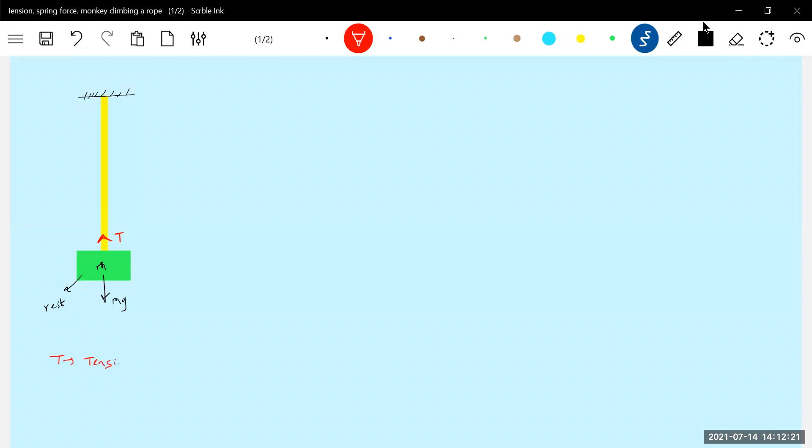And how will it act? It will act in this way. Agree with this. So now what is T? T, I am going to call it tension. Now what is tension? How to define tension? Tension is a force set up in a string. So tension is a force.

Next question: can you say anything about tension? We are very new to it. Regarding tension, the first point is what is the nature of it? It's electromagnetic in nature. It always acts away from the body.

So there is one condition. Then sir, what else? Still only this much. Further, it always acts tangential to the string or rope. Here string, rope, thread, both are same.

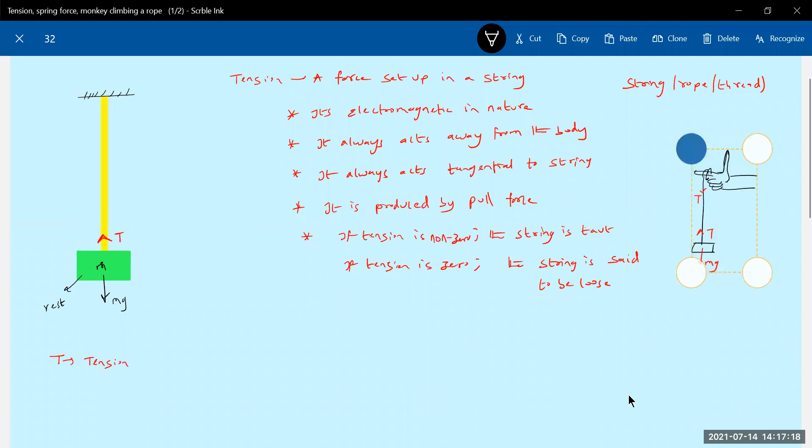There's one basic condition we are defining. So what do you mean by loose? Like suppose if you don't suspend anything, let me take the same diagram. You remove this, then how will the string be?

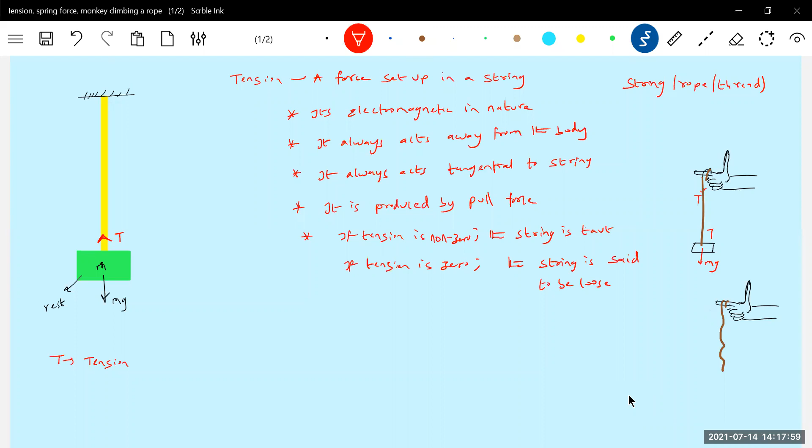Some of you are saying sir you're not seeing it properly. Okay, got it? This one is called loose, the string is loose. This particular string is called taut.

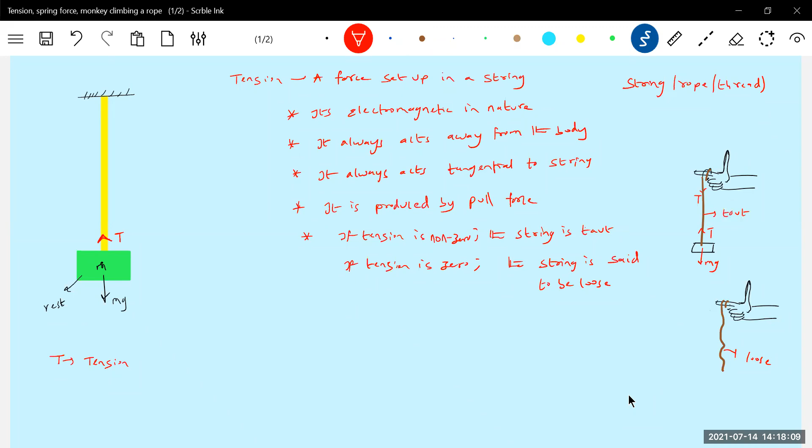I'll give all the examples. This is very important, if you start checking you can see that. Almost every numerical we encounter this tension. The concept of tension is very, very important. So it's like a string, thread. It's left to you, whatever you want, you can call it that.

Okay, I get this. So there's one very basic idea regarding tension. Let me give you its electromagnetic nature. I can't say much about the gravitational force here. It's electromagnetic nature, due to interaction between the molecules, this comes into picture. So being electromagnetic in nature, it always acts away from the body.

You see that one, at this end the tension will act here. At the upper end, the tension will act in this way. Then what this rope is doing is trying to pull down. Definitely what this rope is trying to do is try to pull your finger down. So therefore I'm showing the tension force.

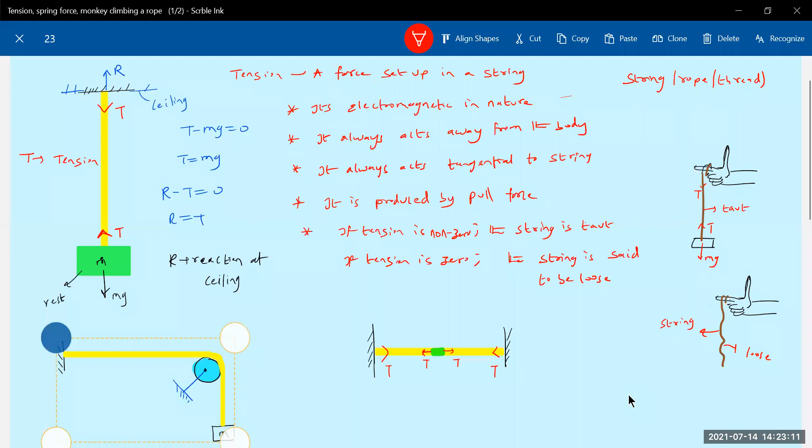There's a rope we have like this. So I have suspended here, I'm going to suspend a block. Then what we notice here again, it can happen, no, like this. And sir, what is that disc? This is called a pulley.

Go to a medical shop, ask for a pulley rope, they'll provide this one. The rope will pass over it. So what is this? This one is a rope. Rope, string, thread, all are the same.

Okay, let's analyze here now. What are the forces acting? The weight mg will act. Who will balance this weight? Tension. So how will the tension act here? Away from the body. So let me show the tension here. The tension at this point will act in this way. Similarly, the tension at this point will act here, and the tension at this point will act here.

And here, the reaction, if you want you can give something. Let me use the word reaction, R. R is not radius, R is a reaction.

Okay, there's a pulley, so there's a rope, so we'll get this one. So I will define a small element. Then how will the tension act? You have to show the tension as acting away from the body. Getting the idea?

Sir, R equal to T also? R equal to T, yeah, here also. What is this? There's a wall. So here T minus mg equal to zero, T minus R equals zero. You can write R equal to mg if you want the reaction.

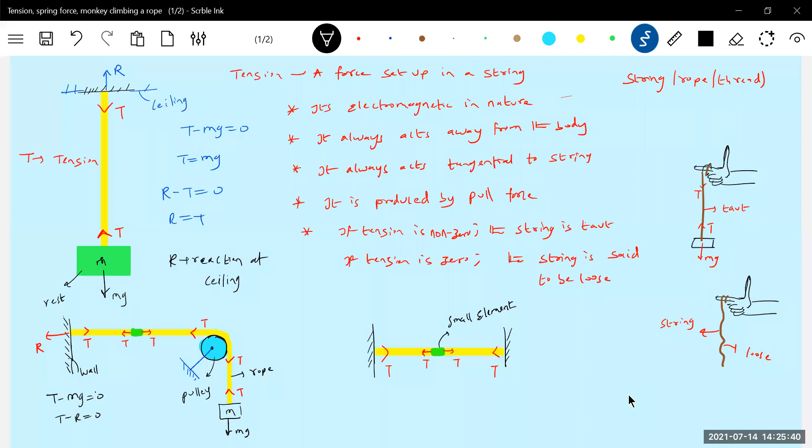Make an observation. What is that green color? Small element.

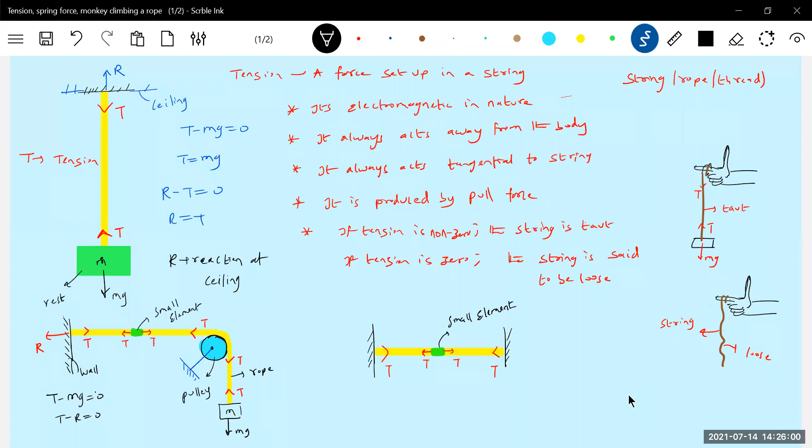What do you mean by normal force? Fatima, what do you mean by normal force? Something, okay, what is normal force? Where you want, tell me. Sir, from the wall. No. Just like, see, this rope, very simple. Please don't think very big, just take a nail, tie a rope to it, and try to pull that nail with the thread. That's what I'm discussing here.

Sir, but there also normal force will come. If you connect a thread to it, so there won't be that one. The tension force is nothing but the normal contact here. Okay, sir.

So okay, fine sir, everything, it always acts away from the body. Are you treating this pulley as a body? Yes, for this pulley and body, and it will act tangential. You see that one. Here I'm showing tension like this, for this part. How is this? Here it's vertical, it's horizontal. So it will always act tangential, away from the body, tangential.

And what do you mean by taut? Is it taut? Yes, the string is taut, tension non-zero. Is it taut? Yes, string is tension non-zero, taut. What about this? Loose, because there is no weight suspended.

Next, again, the tension is produced by pull force. What do you mean by pull force? The weight, and the ceiling is trying to pull the rope up. The weight is trying to pull down. The resultant of, so these two are what? Pull forces. The weight is here, what happened? The mg, it is trying to pull down. The ceiling is trying to pull up. So what forces are acting on the rope? The pull forces are acting.

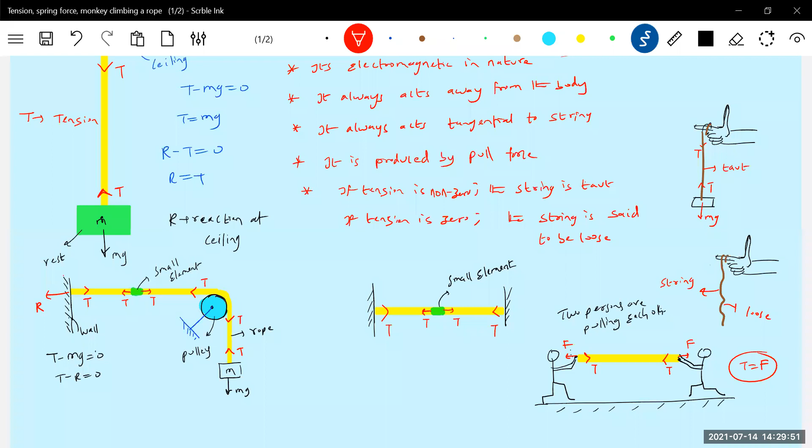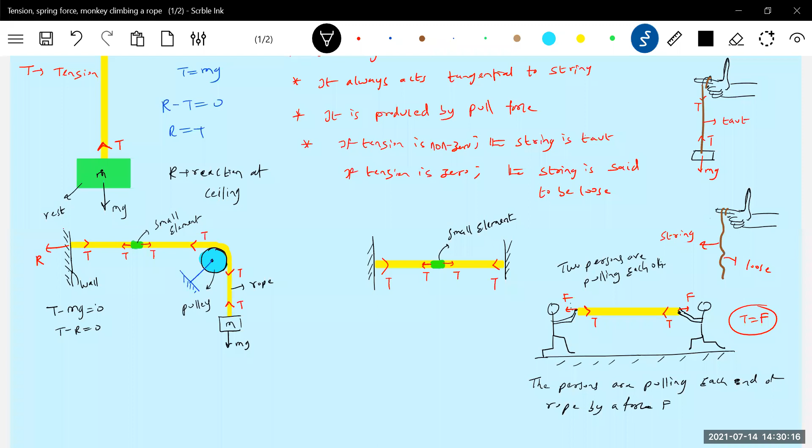Okay sir, so now the persons, let me just write here: two persons are pulling each end of a rope by a force F. Now the tension in the rope is T equal to F. With what force the persons are pulling, that is what the tension here is.

Sir, if both pull with the same force, then tension will be 0? Tension will be 0, sir? Some common sense: if you pull both the ends, tell me, what is the state of the rope? Taut, no? When the string is taut, tension should be non-zero.

Not played skipping, huh? Not plate skipping. Never played any skipping with a rope? I'm asking something, okay, later on will come. Did you play skipping or not? Yes, sir.

Did you ever tie any clothes on a rope? Yes, sir. Did you first of all see a rope? Yes, sir. Okay then, if you pull it, tell me what is the state of the rope. You and your sister or brother hold the rope and try to pull each other. Tell me, how will the rope be? Straight, no? So it's called taut.

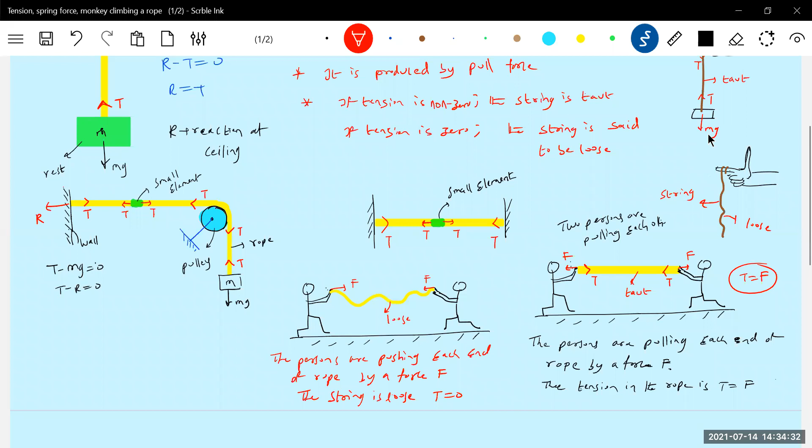Okay, make observation. I'll go for a few more cases, a few more things I have to explain.

So here string means nothing but the thread, cotton thread, which we use very frequently in our home to stitch clothes or something. It can be even threads or cotton thread, or any material. Rope, rod is different, string is different. Please do understand, rod is different, string is different.

Somebody is telling, sir, is it rod? So rod, string, if you don't know, what shall I do? This is not a rod, it's a string. Please, all of you, some minimum common sense must be there. Again, rope or string or thread.

To hang clothes is what that string is for, that's what I'm discussing here, nothing big. Okay, now it will act tangentially. Will tension be opposite to the direction of force? What do you mean by that?

See, like here, suppose you are holding this, your finger, string and block. All this is your body, or this is a part of your body, this is the string, this is a block. You tell me. Only hand is the part of body. How many bodies are you seeing? How many different bodies you are seeing?

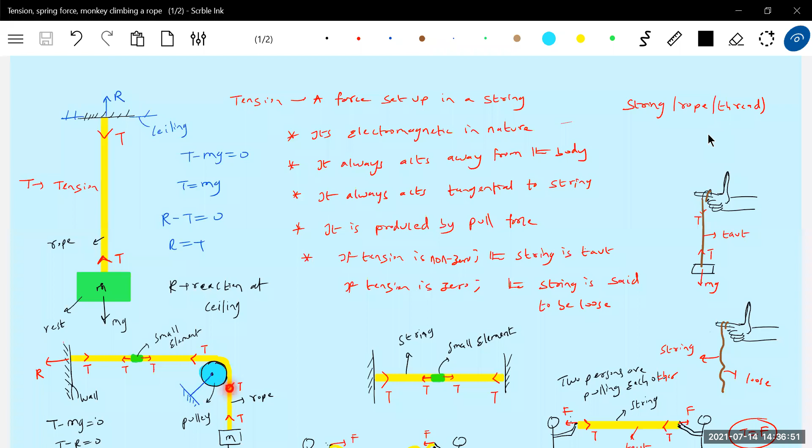Okay, now how come you say that tension is opposite to F? Okay, you're looking at the diagram, you're telling. What is the tension in the rope? T. This F is what?

Person is pulling one end of the rope. At the end of the rope is what this F is acting. Yes, sir. So got it. Okay, this what we are discussing is we are just discussing from one end of the rope to the other end. At one end I'm pulling the rope. Okay, no doubt, I'm holding the rope, I'm pulling it.

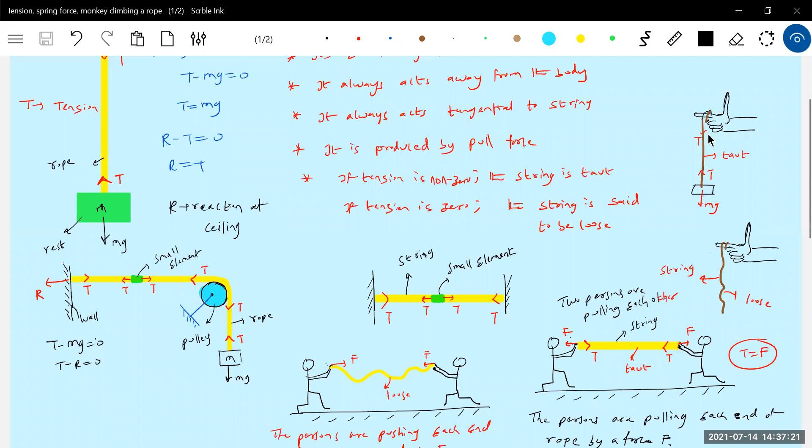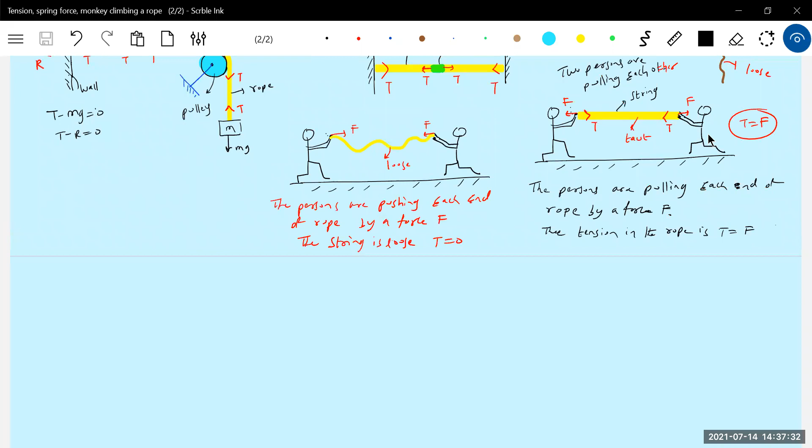Then here what happens? F will balance T. Okay, sir. You have to hold one rope, that is the major problem. Purchase one rope, go there, 30 rupees plastic rope will come, tie it to any door or window frame, try to pull it and analyze, make observation.

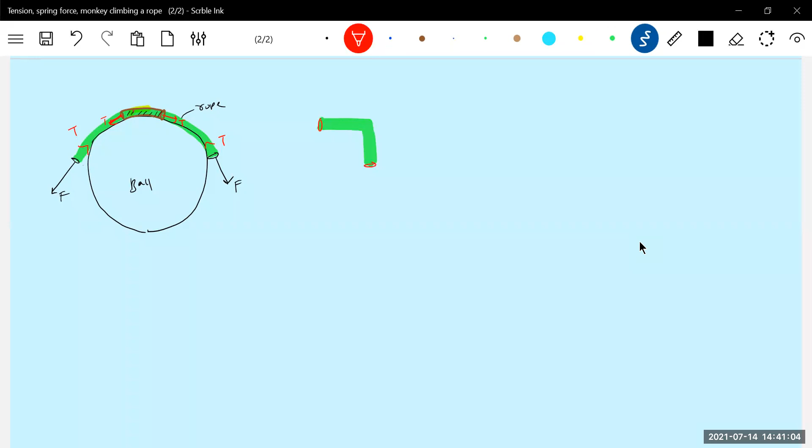How is the tension? So here let it be this one. I am applying a force F, this is an axial force. Then the tension here should be in this way. So the tension will always act tangential. That is the one golden rule.

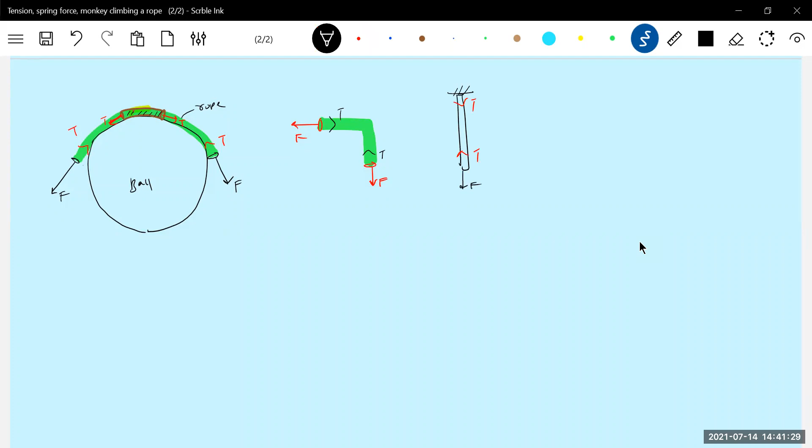If it is vertical, already we have seen how the tension will act in this way. If it's horizontal, how does it act? Tangential to the rope. Tangential. I think now you got the idea. Tangential along the length of the rope, it will act.

You have to show that. So how is it a curve, no? So therefore you have to draw a tangent to the rope. Whatever the shape of the rope, the tension should be directed tangential to the rope.

Who will pull this? These are the pull forces. Okay, pull force I'll show by black color. Now you'll get confused again.

Okay, fine. This is about the basic idea.

Okay, let's take some example. Sure. Thank you, sir.

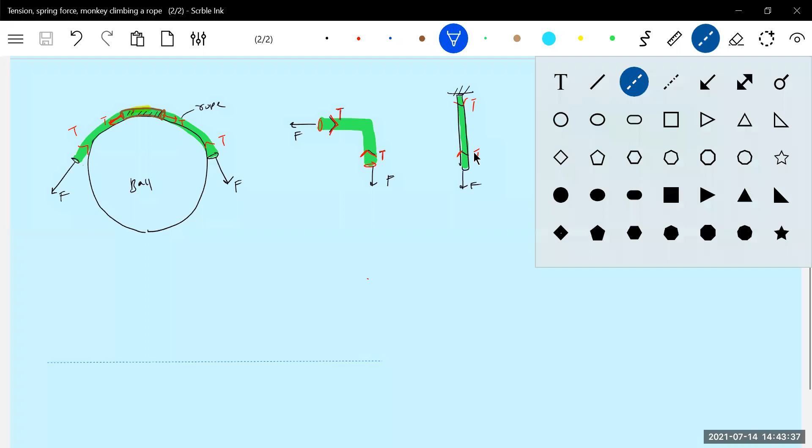Sir, in the diagram, is it tension or force, sir? Right side one, top right. Oh, I didn't write it right. Okay, T it should be, yeah.

We have a string. The string I'm showing by brown color. Instead of showing it thick, I'm just showing it by a brown color line. That is the string. I'll pull this block by force F. M1, M2, M3 be the masses. This is a surface, a smooth surface. You might have played this when you were a kid. Toy train.

The toy train is what we are discussing. We have to calculate now what is the acceleration of the block and what is the tension in both the strings.

Now when you pull the block M1, will M2, M3 move or only M1 will move? All three will move, sir. These are very basics of basics, sir. You tie 3 blocks or any 3 toys, then you start pulling, this will also move. And what is the acceleration of all? Must be same. The acceleration of all blocks must be same.

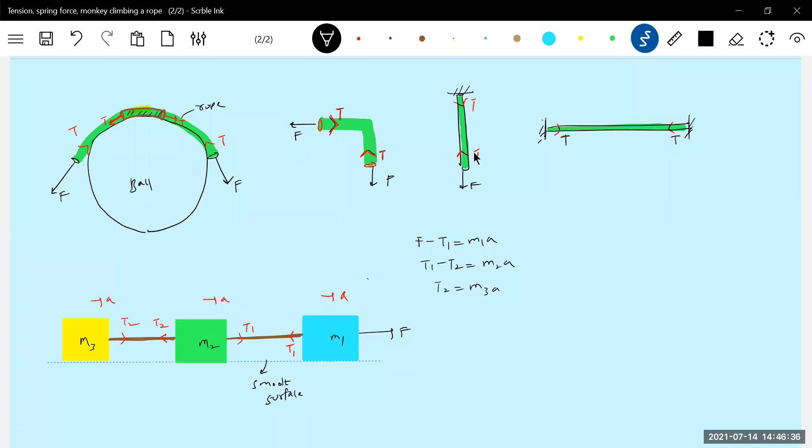Then let's add up all these equations. What is the net force acting on this system of blocks? F only. But what about this? This will become internal to this system. If you look at everything, plus T1 minus T1, plus T2 minus T2. What is the only external force acting? That is F.

So that you are getting it. You can, if you want, write it directly, this is individual, you see that one. Sir, how come you write F positive? This is T1 negative. If a force acts in the direction of motion, it's positive. If a force acts opposite to motion, it should be negative. T1 acting in the direction of motion, so positive. T2 opposite to motion, negative. T2 is acting in the direction of motion, positive. Opposite to direction of motion, nothing is there. Okay, only T2 I am writing.

Okay, I got the acceleration. Let me substitute here. So what is T2?

Similarly, I want an expression for T1. It's left to you, either one you can substitute. Let me use M1. So what is A? F by M1 plus M2 plus M3. T1, we wanted an expression for T1. So F minus...

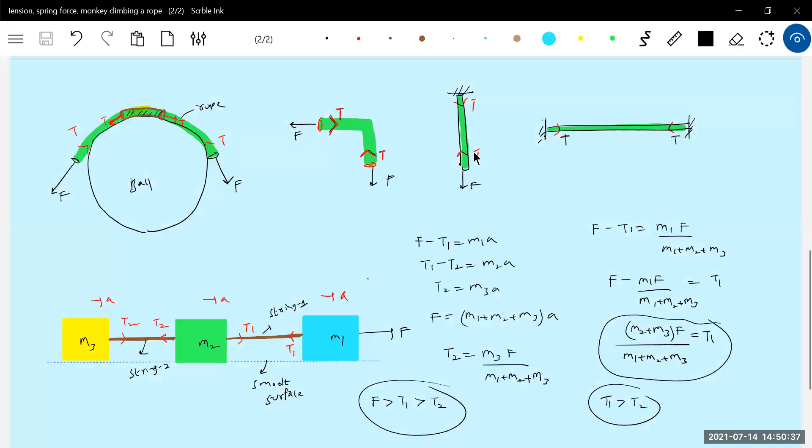Okay, write it down. Now a situation is there like this. There's a rope.

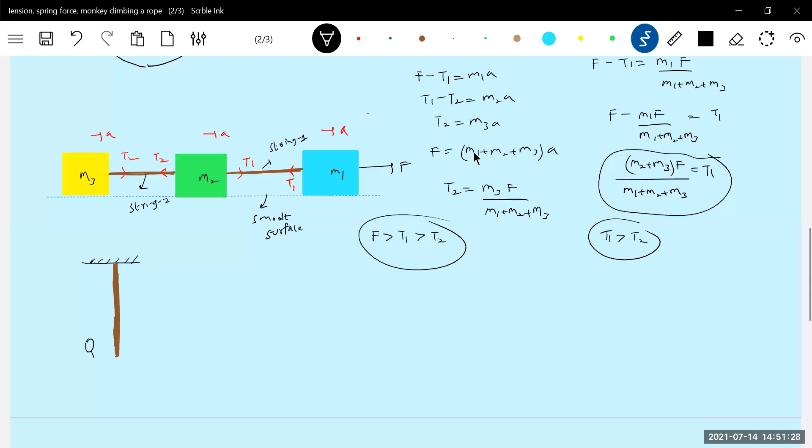Sir, F minus T1 is the force exerted by the second string in between them. What do you want to ask clearly? No sir, how to find out the force between two blocks exerted by the string? Ask the question clearly. Sir, how to find the force between M3 and M2? That is T2, no? Are you not saying string 2? And what is the tension? T2. Okay sir.

No, there's a rope. You pull the rope by a force F. Then how much tension will the rope have? We are going to pull it. I'll pull the rope by a force F. I think there's a quite natural type thing. With what force you pull the rope, that will be the tension in the rope. There will be the tension in the rope.

So the tension in the rope will act here, in this direction. Then the weight of the person will act. The person will press the ground, so the ground will exert a force, Ng. The person will be holding and pulling the rope. Tell me, what are the forces acting on the person?

On the person, the forces acting are, if you like, Mg, I'll write it. So only on the person, I can't draw again the person. The forces acting on the person, we'll draw the free body diagram. Ng and T, sir. The forces acting on the person are this much.

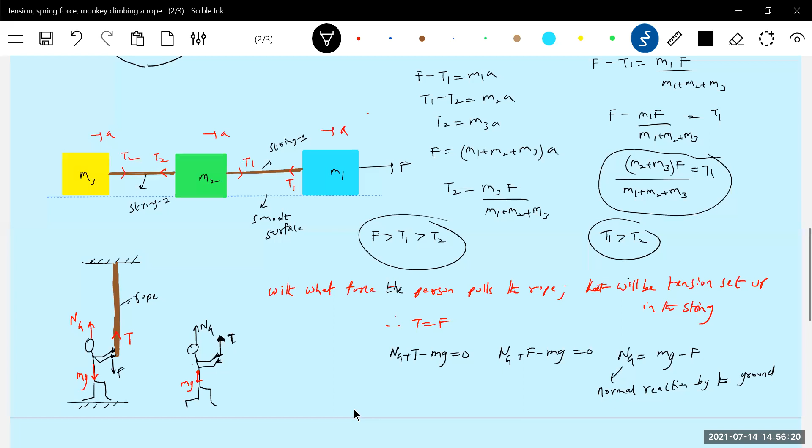Sir, the force is acting opposite to NG, no sir. The force with which you are pulling is opposite to the normal contact force exerted by the ground, no sir. Yes sir, NG and F are in opposite directions, I'm saying sir. F is something, will exert a force.

Okay sir, tell me this F, sir, why you are not showing F on the rope? One end of the rope I am pulling down with my arm, the string will become taut, a tension will act. Now you have to show, on the person, like this. Don't show F on the person down.

Okay sir, understood sir. Sir, I have a doubt. Sir, if the force which we apply to pull the rope is greater than our weight, sir, that time the normal reaction will become negative now, sir.

You will start climbing up, my dear. Sir, but the normal reaction will be negative now, sir. If you were in class, I would have really scolded you like anything. I'm telling you that you are going to climb up, my dear. Yes sir, never seen such things. Very sad, seen sir. Very sad, very bad this is.

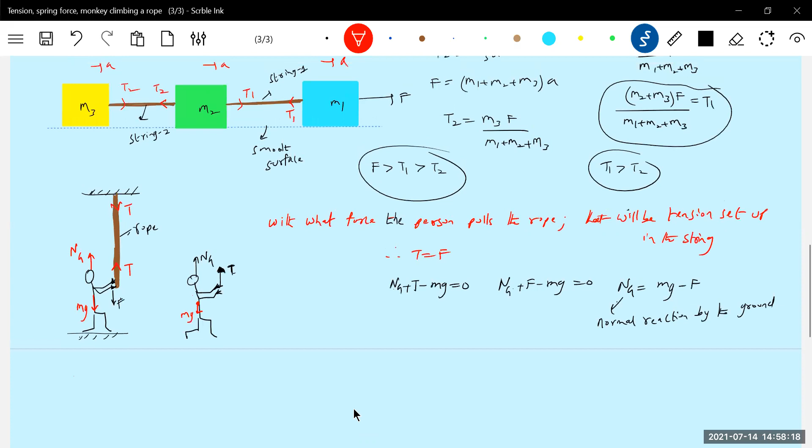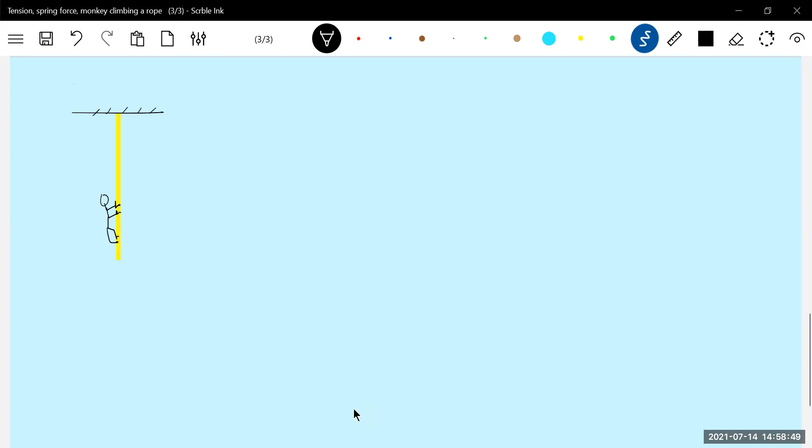Okay, now this is about the tension. So now we'll do one thing. A person wants to climb up the rope. Then we'll see what conditions will arise. This person only is going to climb up, having a weight mg.

So first of all, his weight mg will act downward. Now what is to be done? He should hold the rope tightly. Then he should start climbing up.

Okay sir, fine. We'll do one thing, I'll apply oil to it, then I'll ask you to climb. Possible? Not possible, no, because there's no friction. So what actually happens is there is some sort of frictional force between your palm and the rope here. Because of that friction, the person is able to climb up.

So how that friction here is what brings the beauty of this climbing of the person into picture. Make observation. Here we just say tension, in the books they are given like this. There's a tension, and the tension will act away from the body. In fact, you better take it this way: a friction will act here on the person, the frictional force will act. I'll show, I'll take a little bigger one to show forces.

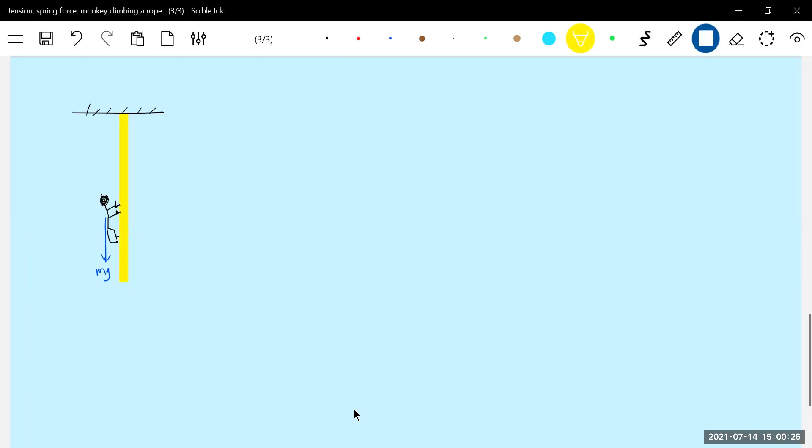It's not a lizard, some person only, so he is climbing up. Here what actually happens is the friction on the person will act here. I'm showing things very clearly, please note. And in turn, the friction on the rope will be like this. This friction is trying to pull the rope down, then nothing but a tension will come into picture. Let's show by...

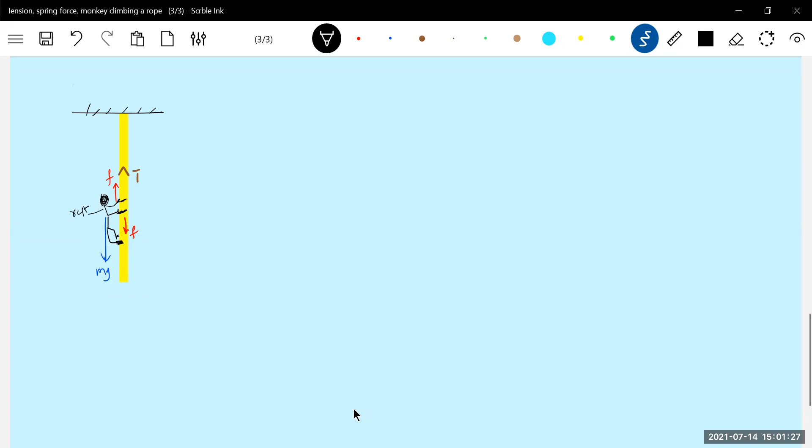If you take only the person, what are the forces that are acting? Suppose a person is at rest, then how you write only the person? Okay, I'll bring the person separately. Then if you bring the rope separately, let's see that.

Now, what is the state of the rope? It is taut, no? Why it is taut? Because the friction here is some sort of acting downward. Now the string has become taut, so a pull force is there. Sir, how come only one force? At other end there will be a force acting, then here the tension will be there. Tell me, what are the pull forces? Here the friction is trying to pull it down, the rope. At other end, the ceiling is trying to pull up. These two will set up a pull force. Because of that, the string will become taut. So what is the state of this string? It will be taut, I have to show tension here also.

Got this idea now? So here in the books, what happened is this F is what they removed, that is they're telling that this tension is acting. But this is the basic idea. Individually, if you analyze the force acting on the person and the rope, you can see why the string is taut. What is the basic necessity? The string will be taut only due to pull forces. Which part of the string will be taut? Only this part from where he is holding. This may cause confusion, some students are getting confused. I have to show this friction here.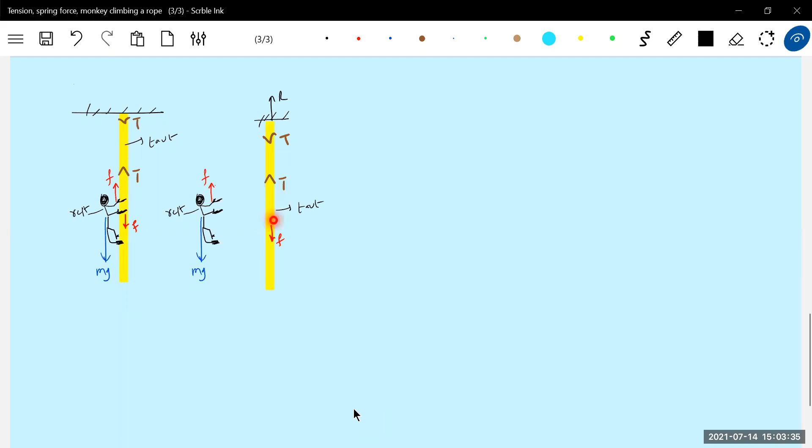It's not on the person, it's on the rope. Let it be here. Now, which part of the rope will be taut? Only this part, the remaining part won't be taut because nobody is there pulling it down. Getting this, this part will be taut. You might have seen this in many programs where you hold the rope from here to here and it will be taut, while this lower part will be loose, because there's no pull force in the lower part, so no tension here. So this part will be taut.

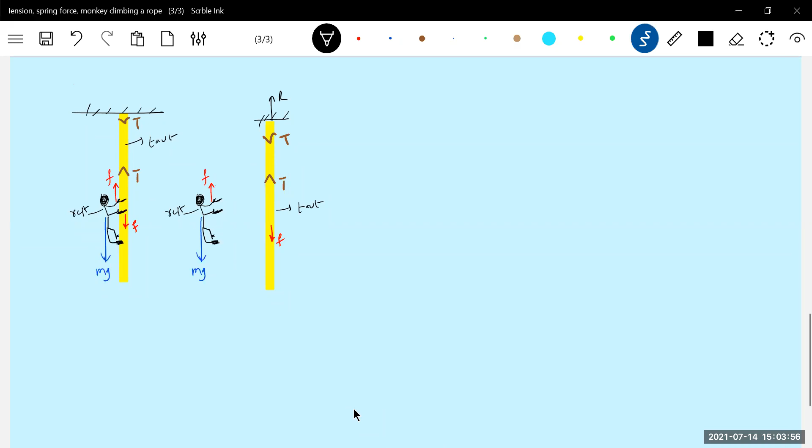Now what is the tension in the string? This F. Now the person is at rest. For the person to be at rest, F minus mg is equal to 0.

Then on the string, it is taut. So net, how will we write here on the string? What is the equation? T minus F equal to 0. So finally, what can we write? T is equal to mg.

This is a basic idea we have to bring here. But, sir, is it tension acting on the person? No, the friction is actually acting. The previous problem I wanted to explain, but everyone would get confused, so I brought it here. Now the exact explanation is what I am trying to give.

Okay, got it now? So now if you apply oil and try to climb, it will become slippery. Not possible, because there won't be sufficient frictional force and you can't climb up.

Now if the person starts pressing hard, how will this friction come? It depends on how much hard you press the rope, how tightly you hold the rope, and you will start pushing yourself up. Okay, now the person starts accelerating. What conditions will come here?

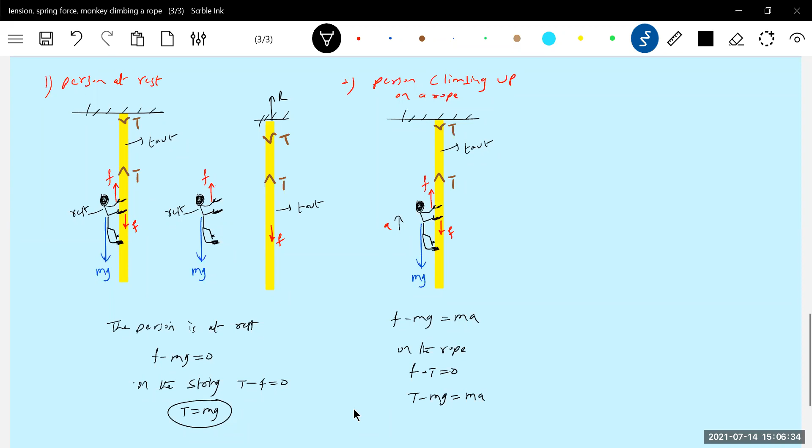So he's climbing up the rope with an acceleration. So T equal to mg plus ma. So what is the tension in the rope? Equal to this much here.

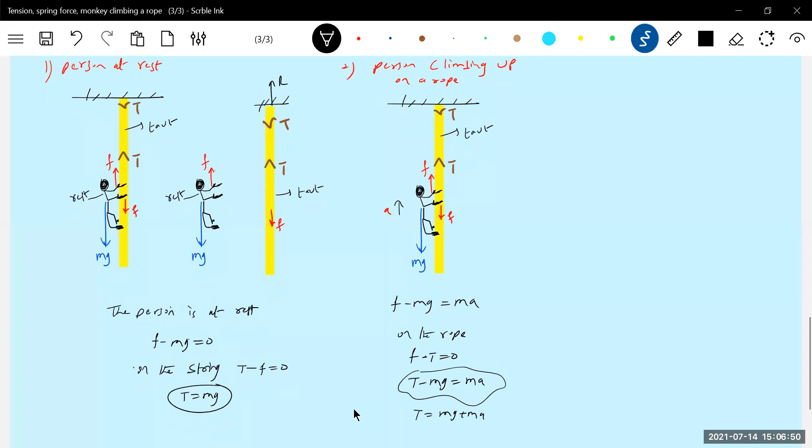Similarly, we can make a situation where the person is climbing down. Try to analyze it very practically, it will be very easy. On paper, see what all we can do. Nothing much is there, just some basic idea — if you have that, it becomes a little easier. You can pass through all these topics very easily.

Now in this case, mg minus f equal to ma. On the rope, what is the equation you can write? So tension should be like a pull force. Okay, this F is pulling. What about the other force, from the ceiling? Now from here to here, can you show the tension? You have to show it away from the body. This ceiling is like one body, so tension here, and this person holding here also you show the tension. Got it now? That's the same thing here.

So if you want, you can write here R, no problem. Finally, what you can write here is mg minus T equal to ma. What is the tension here now? Mg minus ma.

So if you want to climb up, what you should do? Now, what do we have to do? Yeah, it is there, climbing down. Now, if I want to stay there only on the rope, I should press the rope in such a way that the frictional force acting should balance my weight, or the tension in the rope should be equal to my weight, indirectly. I should press the rope so hard that the tension should balance my weight.

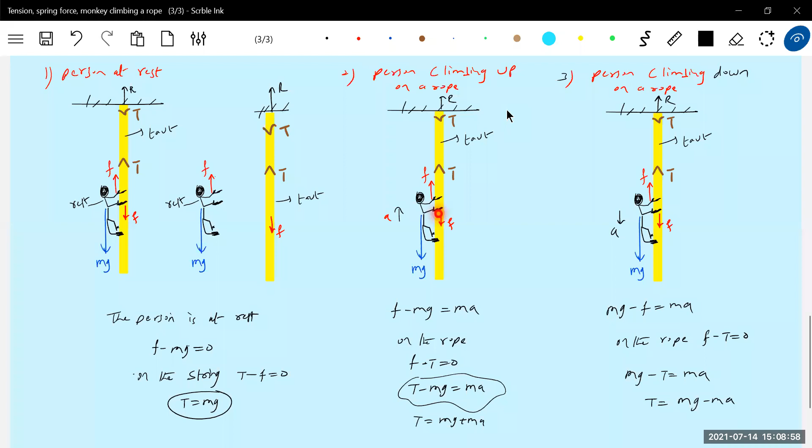Now what should I do if I want to climb up? I should press the rope hard, and I should try to climb up such that the tension in the rope is greater than my weight — then I am going to climb up. If I want to climb down, I should open slightly, not press the rope so much. Okay, there should still be some friction between me and the rope. Then, if the tension in the rope is less than my weight, I'll start climbing down. This is what in the books we explain.

Sir, here pressing the rope means we should press it downwards so that we can move upwards.

Sir, can we take M common here? Yes, you can take M common. Press down, press up... oh god, like climbing up a rope, don't know.

How do you climb up? Just by pressing will you climb up? What should you do to climb up? What should you do with your fist there? You'll hold the rope, no? So you are going to move your arms to move up. I can't show the climbing up of the rope here, only one diagram is there, please do understand. How do you climb up the rope? Just if you press it, will you climb? No, you are going to move your arm, holding the rope, moving your arms up. So when you press hard, what happens? The tension becomes greater than mg and you start climbing up. Just by mere pressing you can't climb. Please do understand, or else watch some video, or climb the rope yourself.

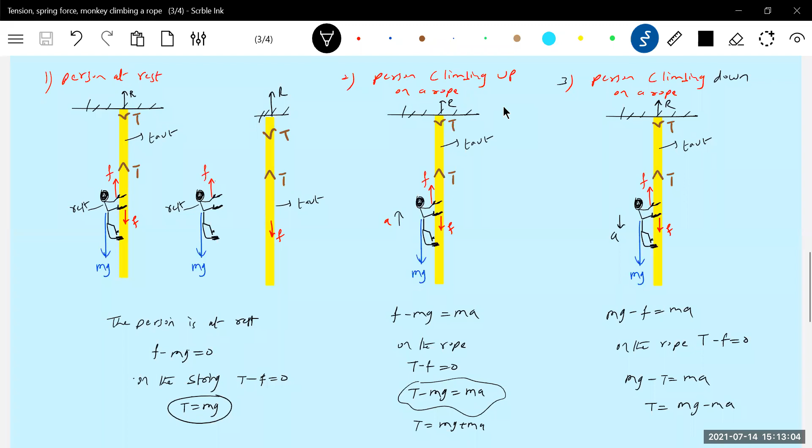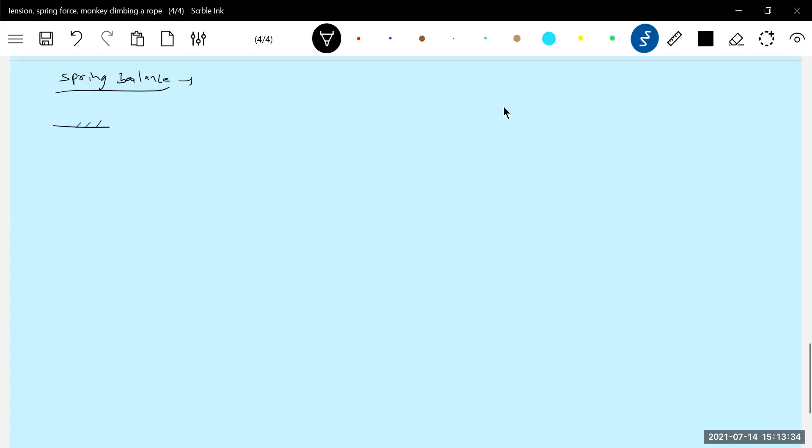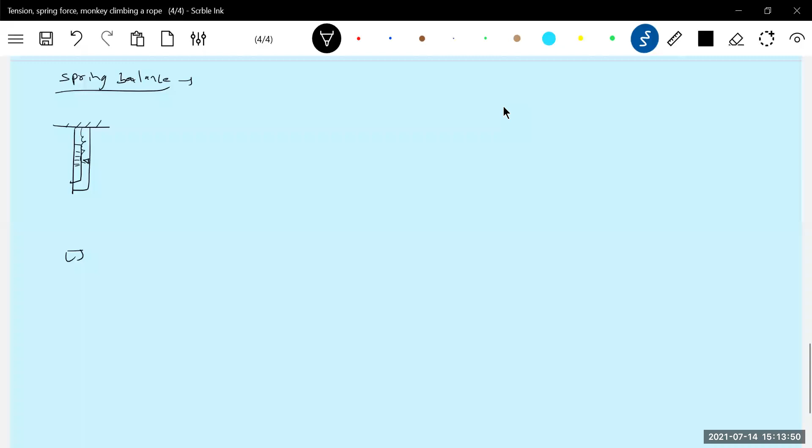Now I'll introduce the idea of spring balance. We will take this one, this is now I think a weighing scale. A good example nowadays, we can also weigh at home, like 10 kgs, 5 kgs to measure that particular weight, when we'll be having a spring. No idea, just at least watch something. So we'll be having a pointer, we'll be having a scale. This will be a pointer, and here a spring will be attached to it. From behind, a spring will be attached. Depending on the weight you suspend, the pointer will point at that one particular position. Sorry, the spring will move to this position. Just giving a rough diagram, very rough diagram. Yeah, it'll be, and this will be the pointer. Red color, where it is. Yeah.

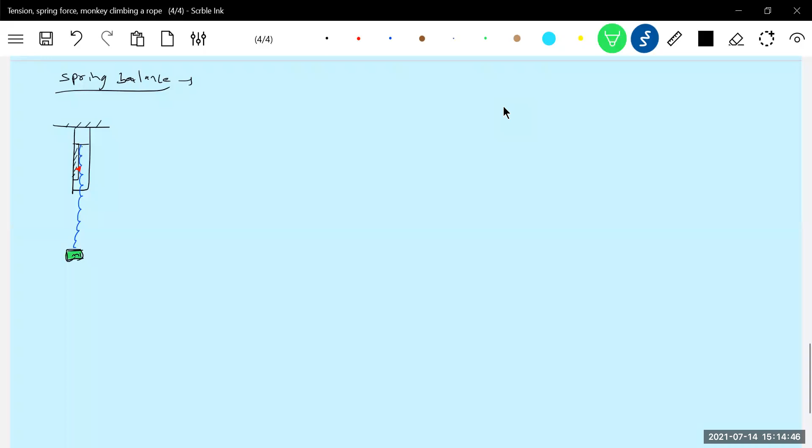Based on that, the pointer will be moving. Okay, we'll bring the pointer here, that'll be better. This is called a basic spring balance, purchase for 150 rupees, it is available. So they'll get a better picture, or you can construct your own also. So what is the spring balance? It is used to measure the weight of a body, of any body. Depending upon the spring balance measuring capacity, you can purchase 0 to 100, 0 to 10, 0 to 5. It all depends on the usage, for household usually we'll go for 0 to maximum 5 kgs. Like this you can hold it and you can measure. Instead of a block, they'll give some sort of a hanger here. So anything you suspend to that, you can measure the weight of it, and here the scale will read. That's what the spring balance is, what I'm discussing. Many spring balances are there, there's a very general basic one I'm discussing here now.

Okay, now what is the spring balance? So here I will just show it like this. There, understood, it's a spring balance. Agreed?

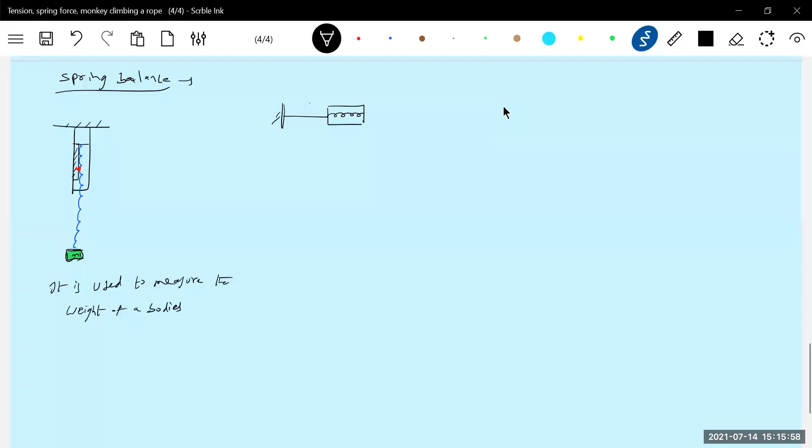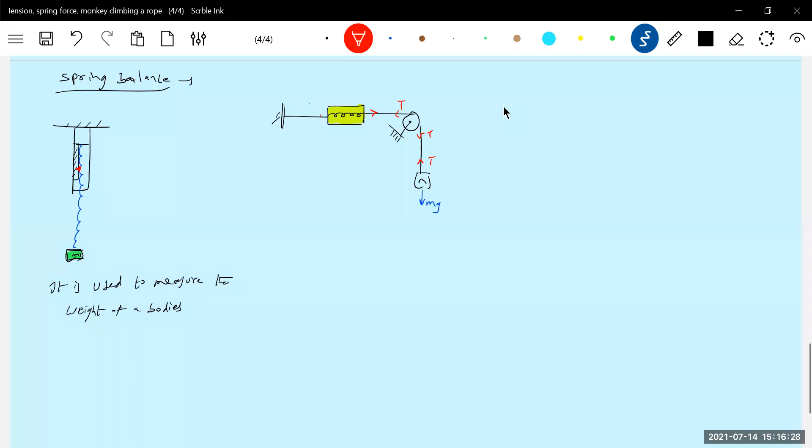The spring balance will show by yellow color. What is the reading of that? How it will be? So you can proceed like this. The string will be taut because weight mg will act, and here the tension T. The reading of spring balance is nothing but this tension. There is a reading of the spring balance here.

So what is the reading of spring balance? Now what is the state of this block? It is at rest. So what we can write? T minus mg equal to 0. Then what is the reading of spring balance? Reading of spring balance is equal to T, which is equal to mg.

How much force is acting here? That is only what the spring balance shows. Sir, what actually is spring balance? Spring force will act here, and it will reach a certain value.

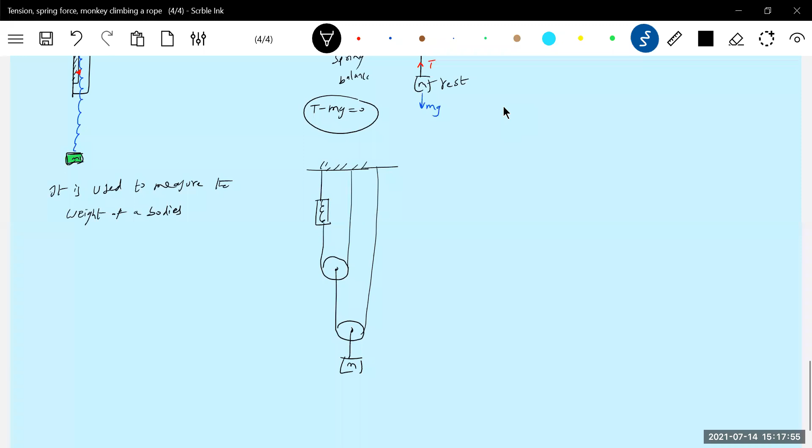Let me give one more example. Here I am suspending a block, and I want the reading of this spring balance. These are pulleys, called light pulleys. The pulleys are light.

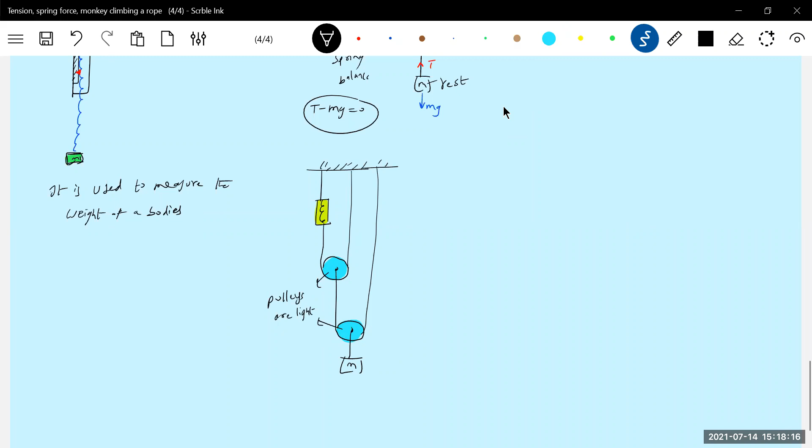Sir, once can you scroll a little bit up, sir? Yes, sir. I think we can see everything.

Okay, now let's get into the discussion here. So here the tension, the string - all strings are ideal. All the strings are massless. Strings are ideal, meaning massless and inextensible. This is a generalized rule - if I mention otherwise, you take it, but by default we assume they are massless and inextensible.

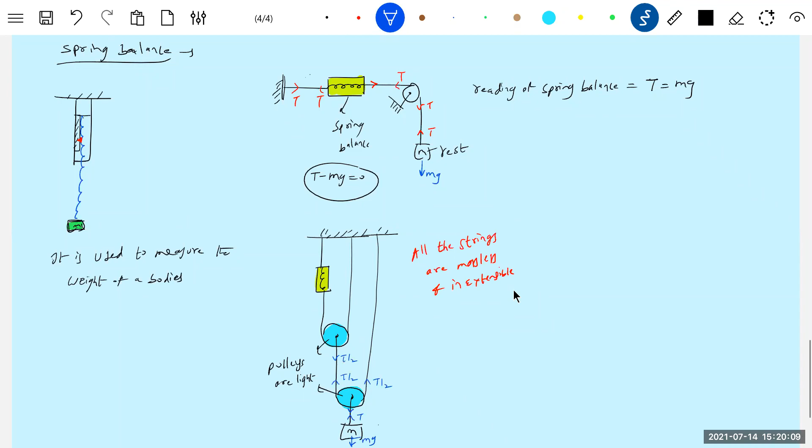Then what are the forces that will be acting? Here mg, tension T. Then this pulley is light, so the net force on it should be 0. So here how much tension? T by 2, T by 2. Here tension T by 2. Tension should always act away from the body. So how much here? T by 4, T by 4. How much of tension? It has to be here T by 4.

Now this is what the spring balance shows. Then what about looking at the lower block? What is the state of it? It is at rest. Then what is the equation you write? T minus mg equal to 0. Then how much is the reading of spring balance?

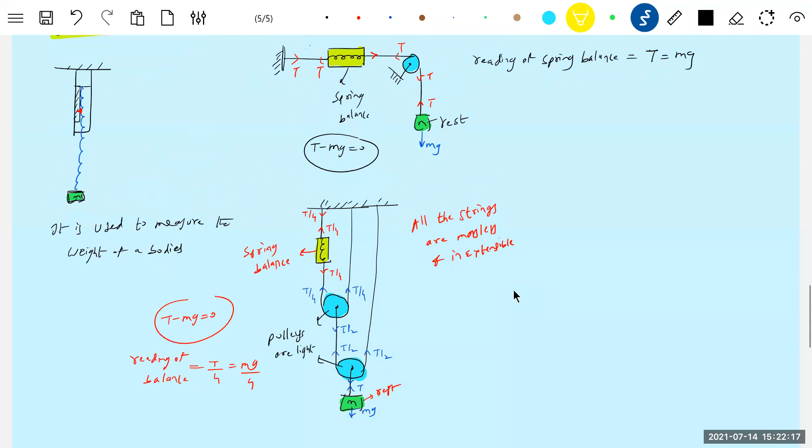Nothing to do. Okay, make observation. We'll take the next conditions. Okay, now we'll - 1 minute, sir. Okay, sir.

Sir, can you once explain why the reading of balance is T by 4, sir? That's what the tension there, it will act. What is there in explanation? Huh? Okay, sir.

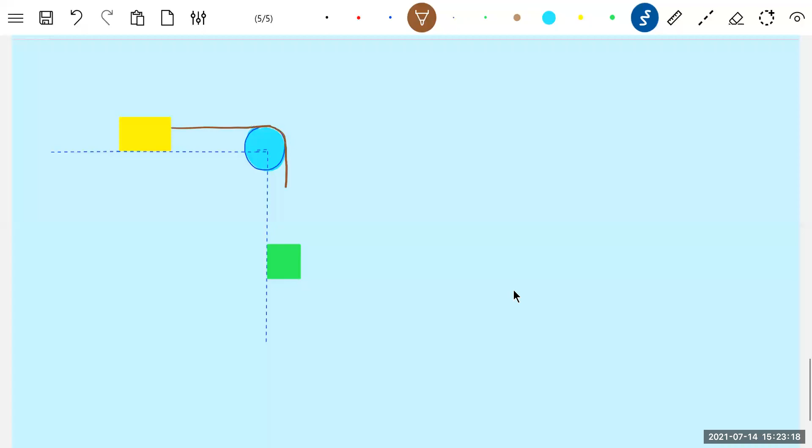This is a pulley. So this is a rope which will pass on it. This is a block, having mass m1. This is m2. Let's analyze the motion of this one. So what is the pulley? Pulley is just connected to the - hope everyone has some idea. Pulley is like a wheel, where the string can pass over it. Yes, sir, yes sir, this one.

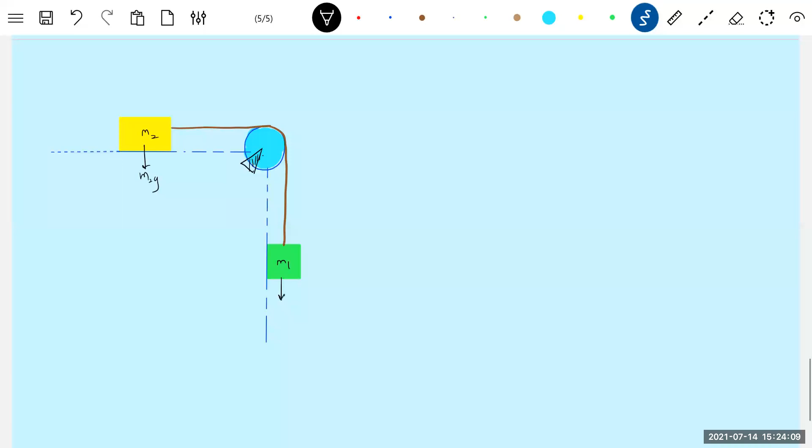Okay, now let's analyze the motion of this one. What are the forces acting? First, the weight will act, the weight of this will act here. The moment you release, let's see what will happen. This is like a surface, like a table. On the table, I fixed it here. Then the string will become taut. The weight will act, and the string will become taut.

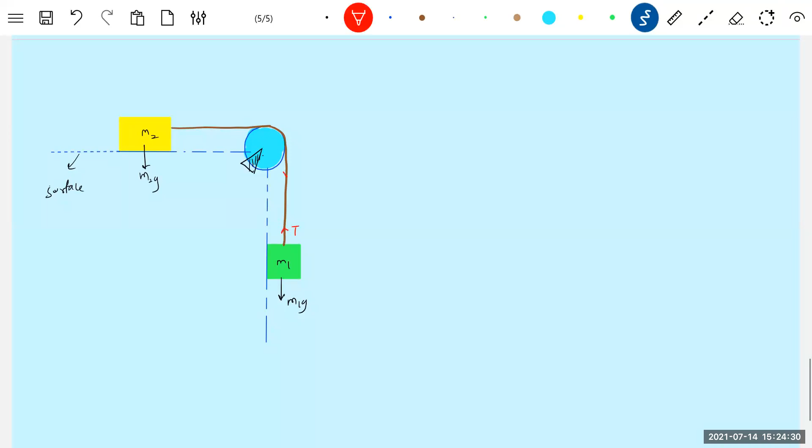How the tension? Tension should act away from the body. So here the tension - on the pulley, I have to show tension away from the body. Then on the block M2, the tension should be like this. Now the normal contact will act. Sir, are these two in contact? Yes. Show it all, nothing wrong. What is N2? N2 is by the block on the surface. What is this N1? By the block on this vertical surface. Now let's see what will happen - this will accelerate.

This will accelerate. Then the equation here will be T equal to M2A. M1G minus T is equal to M1A. So M1G equal to M1 plus M2 into A. So what is the acceleration? M1G by M1 plus M2.

This is very important. Sir, how did you write this? The moment you release, what happened to the block? Will it move up or move down? It will move down, no? This is quite natural.

Say, sir, I don't have a pulley, what to do? No need, just pass this rope over the edge of the table like this. You connect one block here. Sir, I don't have blocks. What do you mean by block here? Any box, you take any box, any weight, or some stone available. It may damage - okay, take any box. Then suspend any box here.

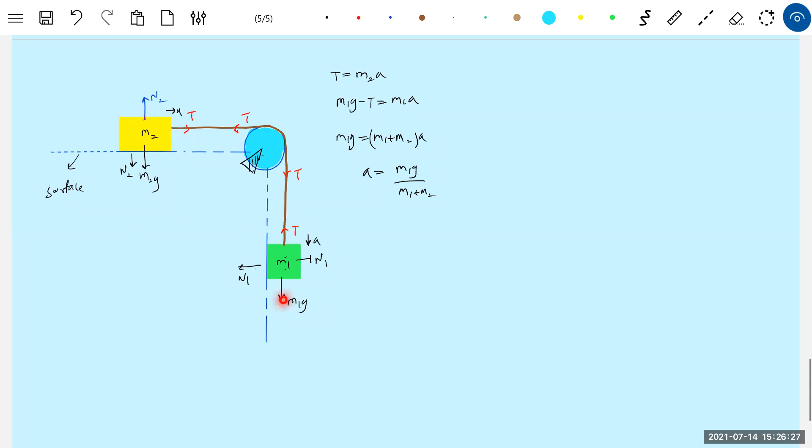Take any box, take one string, pass it over like this, suspend any other weight. If you release, this will move down, this will move towards right. Why does it happen? The tension will make it move. Here the weight is greater than tension, so it will move down. What is the acceleration of this system?

We have this much here. Then what is the tension? I'll substitute this value of a back here. T is equal to M2 M1G by M1 plus M2.

There is a tension in the string. And what is here? This pulley is light. What about this string? String is also light.

Very, very, very important. Those who are not understanding anything, please: thread will be there, eraser you keep it, some box you tie it, you suspend it. Or if this pulley is not there, let it be, no problem. Just leave it here, suspend it. Just make the observation: oh, this is what is happening. Then come back and analyze. But this is very important.

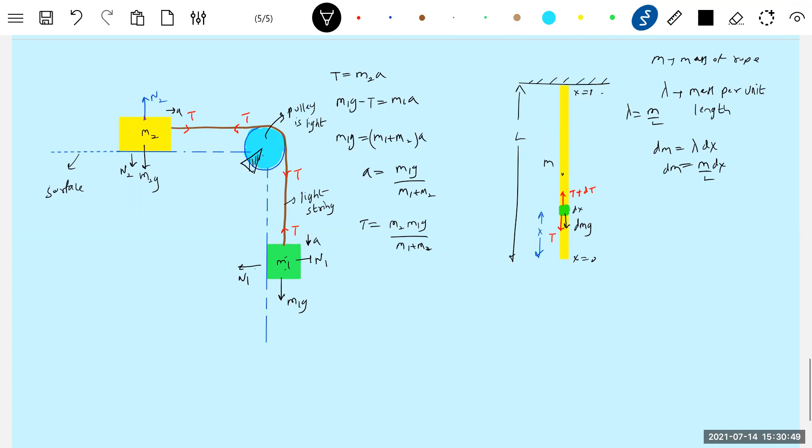I think this will become lambda is m by l. So how do you define this one? A rope of length L, how much mass will it have, m? And this end is defined as x equals 0. This is x equal to L. So if the rope is having a mass, then we define it like this here.

What is the tension at this point? Yes, now we calculate. So now let's come for this one, for a small element. For the small element, the equation is T plus dt minus T minus dmg equal to... why T plus dt? It is acting upward, positive. Why T here again negative? Downward. dmg negative, why downward.

And what is the state of the small element? The entire rope is at rest here. This is what happens practically. Then finally, what do we get? dt minus dmg equal to 0, or dt equal to dmg. dm is what? Lambda dx.

Now let me go for the limits. Now, what is the basic idea? The tension is set up by a pull force. You all know the tension is set up by a pull force. Is there anybody below here to pull the rope? Nobody is there. So therefore, what should be the tension here? The tension here must be 0.

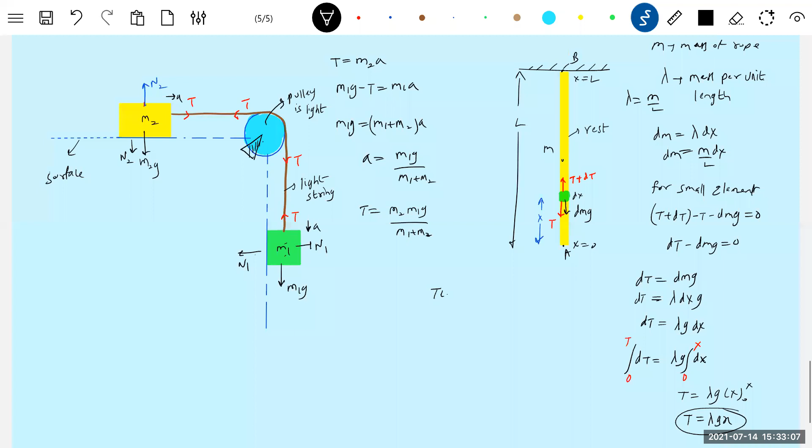Okay, this is the expression for the tension. So tension at a distance x given by this one. What is the tension at the highest point? At the lower end it will be 0. So let me bring A and B. Tension at A should be 0 because x equal to 0. Tension at B...

What is lambda? M by L. What is M? Mass of the rope. This is very simple.

You take a rope having a mass. You hold it at the upper end. What do you feel? You feel the weight of the rope, no? The whole weight of the rope. Simple analysis. I'll draw the diagram.

Like this, you are holding the rope. Here is the rope. Now, will you feel the rope is having certain mass? Let's assume. Will you feel the weight of the rope? Yes, you feel it. So what you feel is that you are holding the total weight of the rope.

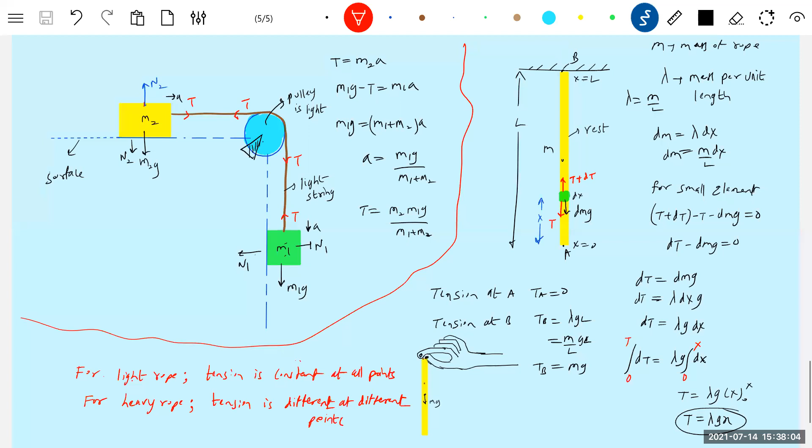Let me give it, sure.

Sir, here tension lambda g x is the tension at that small piece, no sir? Yeah, the tension here it is equal to lambda g x, no sir? That is equal to that small piece, means at the small piece. Yeah, here at this point, for small that element, the green piece. Okay sir. Means as you move away, tension should increase, no? So here T means just above the element, it should be T plus dT. Because who will balance dmg? The T's get cancelled, so who will balance dmg? The dT, dT, yes sir.

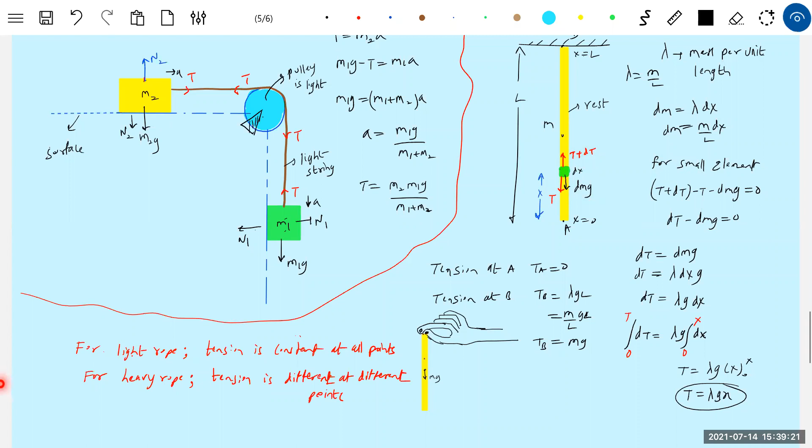I will suspend a block. This is having a mass m1. We'll directly take values. M1 equal to 2 kg, M2 equal to say 3 kg. Sir, numerical, sir.

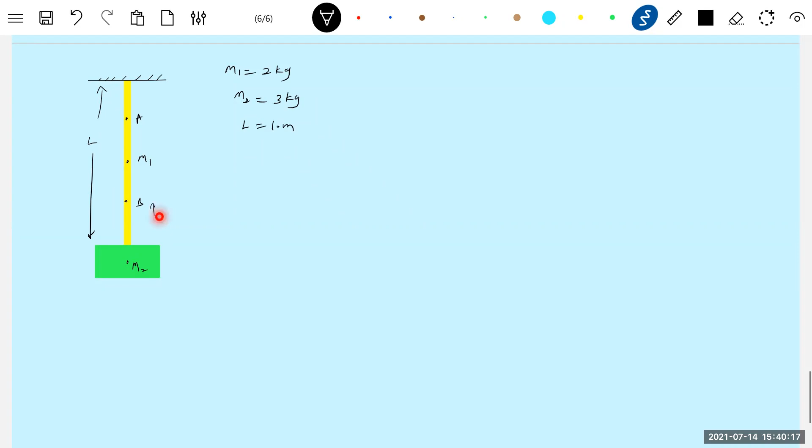These are the points A and B. Length of the rope BL is 10 meter. At 3 meter, this is say at 7 meter or 6 meter, 8 meter I'll take it. We have to calculate tension at various points: tension at points C, A, B.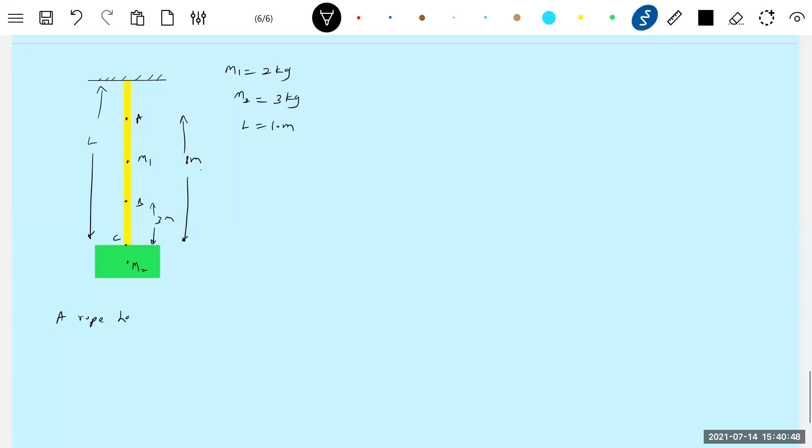What is the rope? Mass of the rope is m1 and length is L, and a block m2 is suspended at the lower end. A rope having mass m1 is suspended vertically, and a block of mass m2 is hung at the lower end, at equilibrium. Find the tension in the string at points A, B, C. G value how much? 10. If I give 9.8, otherwise by default you should take 10.

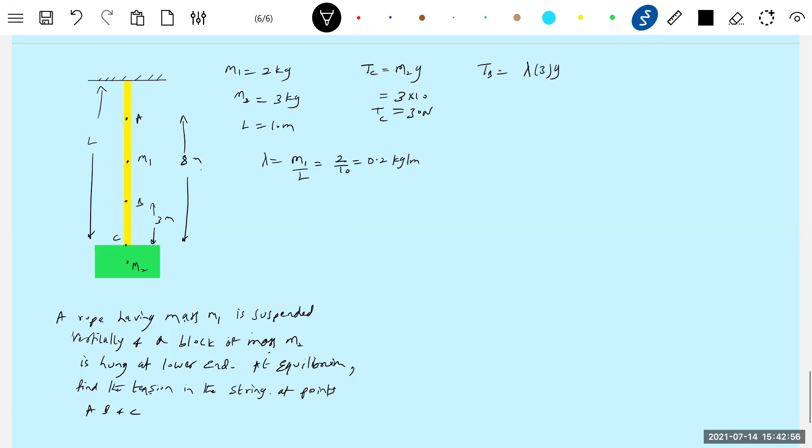Tension at C should be M2G. M2 is how much? 3 into 10, 30 Newton. Tension at B: what is the lambda for the rope? M1 by L, so that should be equal to 2 by 10, 0.2 kg per meter. So tension at B, what we should write? The weight of the rope, lambda into 3 into G plus M2G. If you find it a little difficult, I can show you a small diagram. The weight of this part of the rope will also act. Getting it? So this tension at this point is weight of this part of the rope plus the weight of the block. M2 is equal to 3 into 10. This will be 2 into 3, 6, 6 plus 30.

Tension at point A: lambda into 8 G plus M2G. So if the rope is having mass, then tension will increase from the lower end to the upper end.

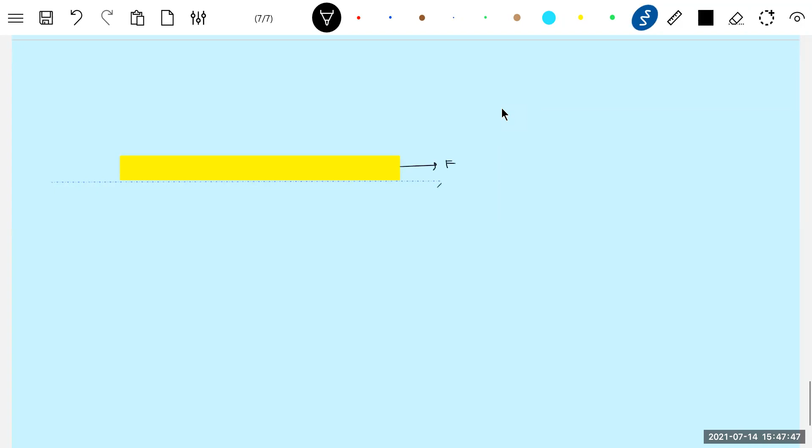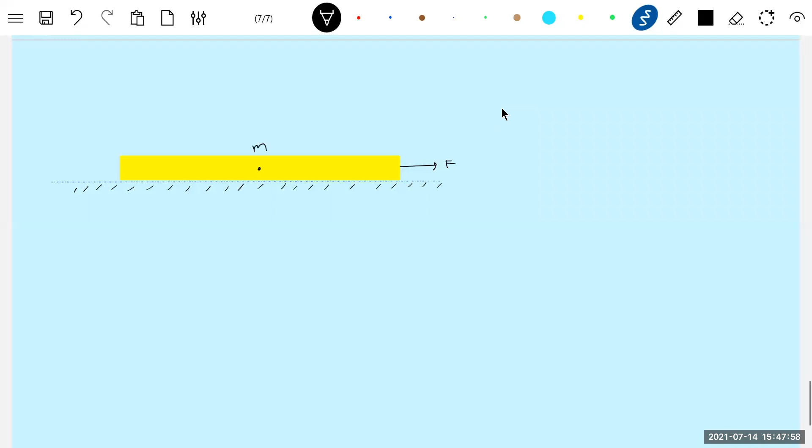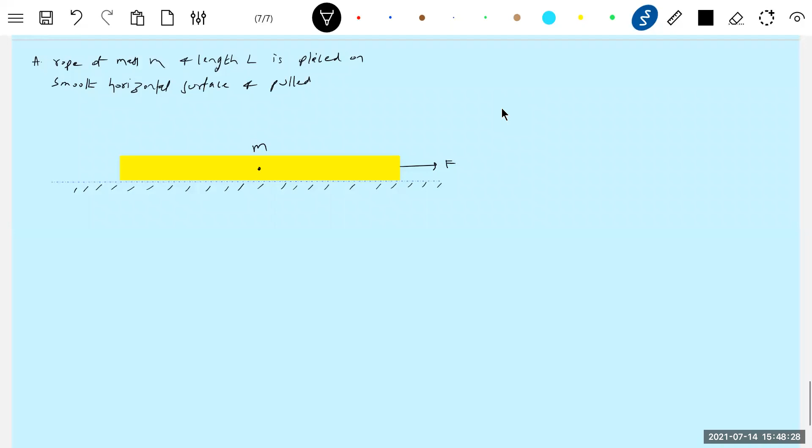Let me take the next condition. If this is a ground, there's a rope - I'm showing it a little bit big like a block, but it's a rope only. I'm going to pull this rope with a force F. Let m be the mass of the rope and L be the length of the rope. A rope of mass m and length L is placed on a smooth horizontal surface and pulled horizontally by a constant force F. Find the tension in the rope at a distance x from the right hand. I'm defining x equals 0, this is x equal to L. Now it's asking to calculate the tension at a distance x here. Quite natural.

Will there be tension? Yes, there will be tension. So what you do is break this up - can we break up things? This will be F, and this will be tension. So now, will all parts of the rope accelerate, or will only a few parts be at rest while others move? All parts of the rope will accelerate. What is the acceleration of this part? There will be acceleration of this part also. Let the mass of this part be m1, let the mass of this be m2 - similar to the two blocks problem. Then let's calculate: F minus T equals m1 a, T equals m2 a.

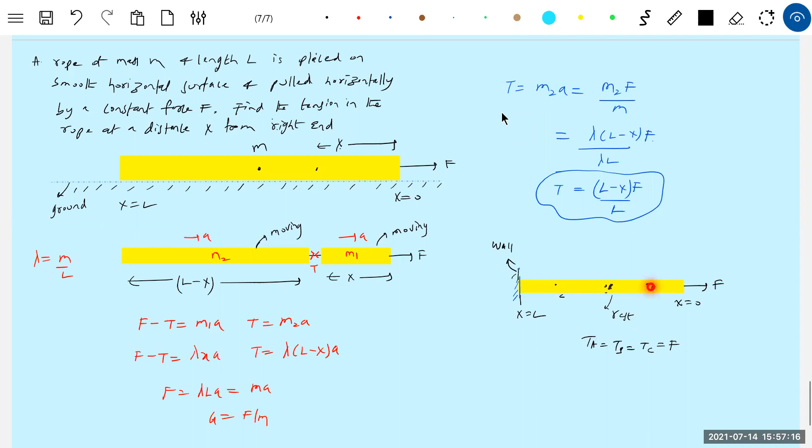This should not be the standard reply from a teacher. In spite of this, we can explain it. Now let me show the same problem in another way so we can analyze such conditions easily. I will come back again to this diagram. So instead of this, let our approach be this one. Let the force be F.

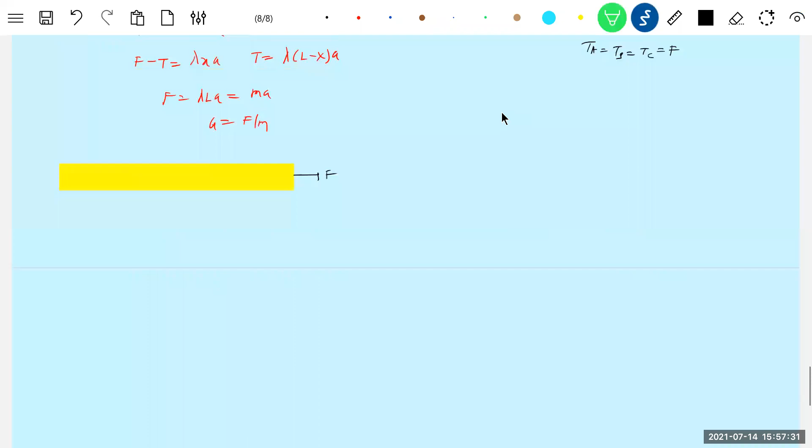Here there's a tension, there's X, then this will be dx. The tension here will be T, because I gave this method, no? On any small part, the tension should always act away from the body. So what is this small element? On the small element I have to show that. Then if I show T and T, okay fine, then what is the net force on the element? Zero. Then how will it move?

So definitely, what do we expect for tension? Where should it be more, on the right hand side of the element, or on the left hand side of the element? Yes, the tension should be T plus dT. Then only will the net force be non-zero, then only will this element accelerate. Otherwise if you just write T and T, it's not justified.

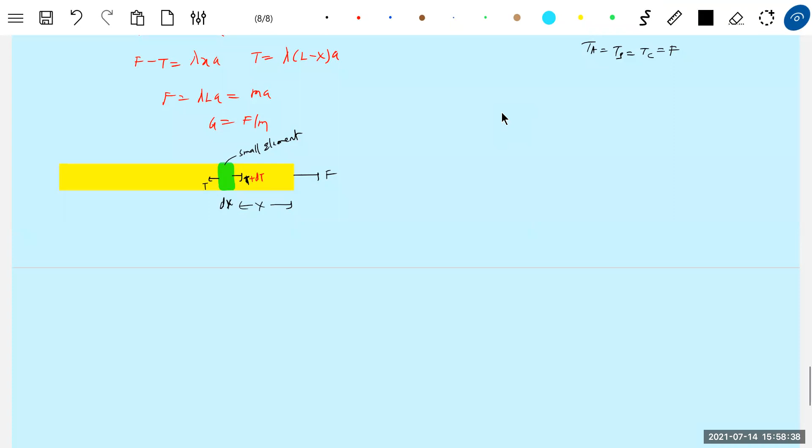But okay, look at this now. A very good condition is there. Altogether, as x increases, the tension is decreasing here, no? As x increases, the tension is decreasing, because x you are going to measure towards left, and as you move from right to left, the tension decreases. So therefore, this will be...

dT is equal to dma. Or if you are getting confused, the best way of writing this equation is T plus dT minus T equal to dma. T gets cancelled, so dT equals dma equals lambda... this will be troublesome, but your mathematics has to come into picture. So why the negative sign? Because as x increases, tension decreases, so dT by dx will be negative. Therefore I am bringing the negative sign here.

So further, this dT equals minus lambda a dx. Let's go for limits. At x equal to 0, the tension must be equal to F. That's all. So here what is the tension? Here it should be F only, sir. Then here it should be X. At X, let T be the tension.

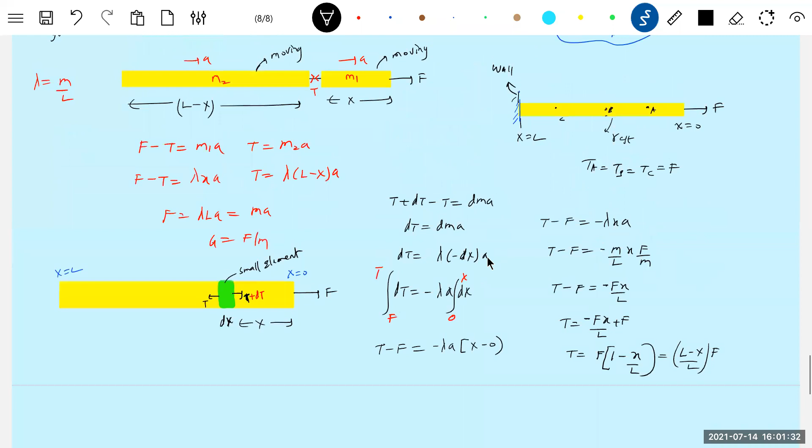I'm going to show the complete description. This will be the other approach, the mathematical approach, and it will help you a lot. Okay, now I can justify it. Now I can justify it.

Sir, is this object placed on the smooth surface or on the walls? On the smooth surface, same thing. Okay, you want that.

And now can we justify our answer? You take a small element, then everywhere T and T will cancel out, so net tension should be 0.

No, you have to break up the tension this way. This is the best method. You break up here. Sir, have you substituted the limits for dt?

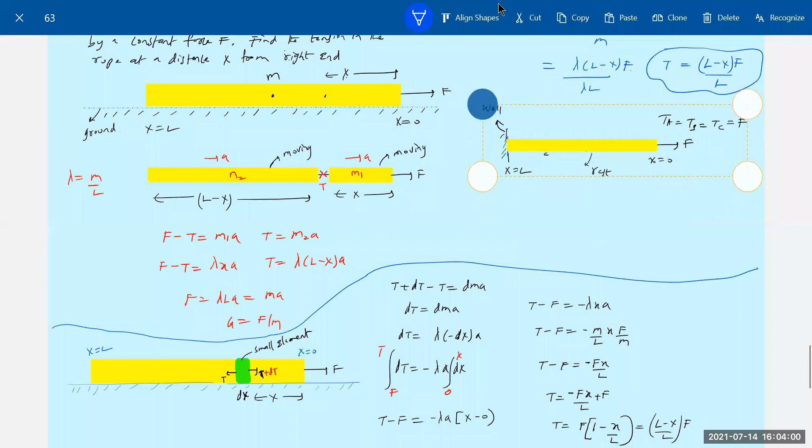This is, I think, a totally different one. I will. No, same thing, I'm going to break it up. Tension at A is what I need. I'll break it up, let's see.

I'll pull this with a force F, just for our analysis purpose. So here what will happen? The tension will act here in this direction. Then what is the state of this element? It is at rest. This is at point A.

Then here tension will act in this way. Then what is the state of this? At rest. At rest means F minus T should be 0, so T equals F.

Similarly, break up here also, we'll see it. Oh, we can't do that. Yeah, I'll bring another one. Let's break up at C also. Then we'll see.

What is the net force on this? It is also at rest. Then the reaction also, let's find out. Let's see what we get. This is also at rest.

Sir, lambda is linear density, no? Yes, it is linear mass density.

Okay kids, like we had the discussion about tension, monkey climbing up the rope, these are the things, and the spring balance also you have come across. So please do think, put effort, analyze, understand. All these that I discussed, you don't need any research lab, you just need some part of a rope, some different shaped blocks, then a spring balance, around 60 or 80 rupees you can get a spring balance.

Take help of all that and try to analyze, think on it. It becomes very interesting, you'll feel, oh this is what I am learning. The interest will come for you. With interest, when you come to class, you'll start making observations. Through observation, you'll start learning things. The knowledge acquiring skills will improve.

Then you'll be in a comfortable position. So we have an opportunity. It's not that all these are high level, sir, we can't invest that much money. Yes, we have an opportunity. Please put effort to learn things. Not like I'm saying do hard work, I'm asking you to put effort to learn things here, not just mere learning.